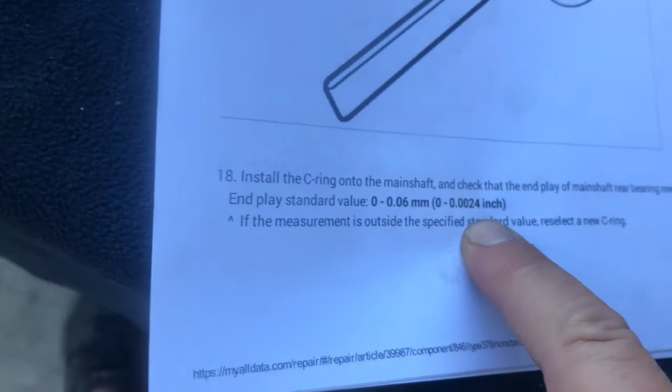I have a 1.5 thousandths feeler gauge, and you put it right underneath the snap ring, and this goes in perfectly fine. It's kind of tight as you go around, so I'm okay with this. The measurement is 0 to 2.4 thousandths, and we're at 1.5 thousandths, so we're good on that.

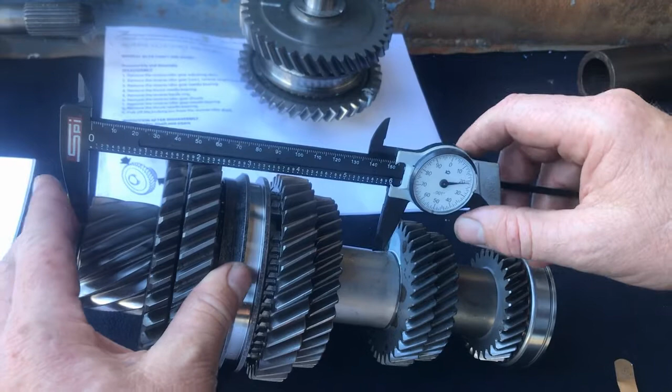So there's another measurement we're going to pay attention to, and that is from the bottom of the small gear to the top of this extension. We can't extend this all the way to the measurement, but we could use an estimate. From the edge right here, that's our measuring edge, to the top of this gear, it should be 1 inch. So this is what we're measuring right here.

Okay, so you look at the picture, we're pretty close to it. We're measuring to the top of the extension housing right here. At the college, we might have a tool that will actually work, so we're just estimating this.

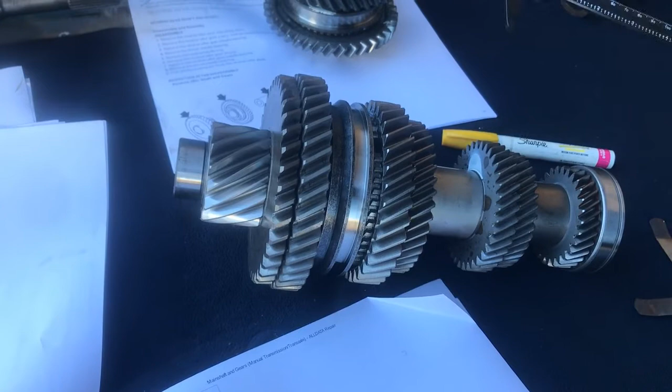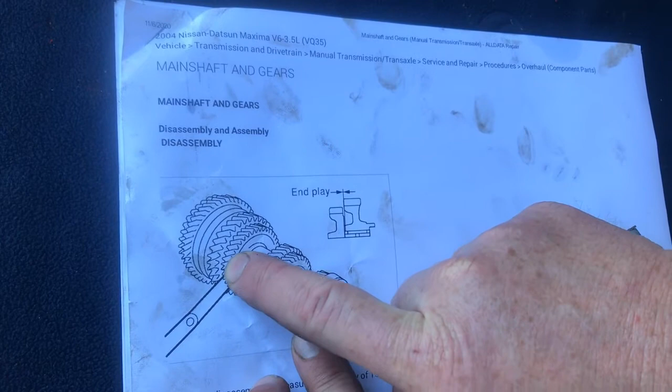And the last measurement is going to be this feeler gauge measurement, the end play measurement right here between these two gears and these two gears. It should be anywhere from 10 thousandths to 60 thousandths. So I have a 28 and a 30 put together, so that's 58. And I'm going to measure the clearance in here.

And that is a nice drag on my tool. By the way, there is movement, so you can actually move this gear in and out a little bit. So there's supposed to be some play. And here's the other one right here. Okay, so 58 thousandths for both of these. I'm actually pretty happy with that.

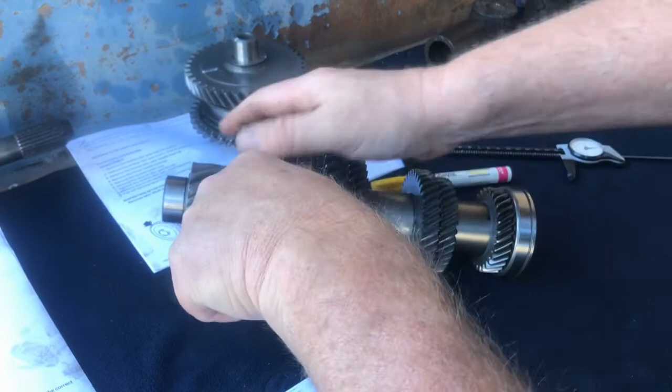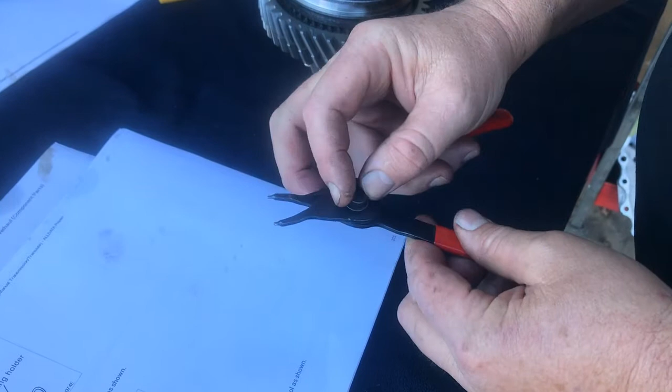So we're going to remove the snap ring, and then there's a C-ring holder, and then there's two C-clips. So we're going to do that. Understand on snap rings, they could be for where you got to expand it, or you could switch it where you contract it, so inside or outside snap rings, depending on your usage.

So a lot of people are not aware that some snap rings like this, you want to expand. Some snap rings you want to contract. I don't want to over expand it because it will stretch it. Okay, there's that, and we're going to start a little line like we did before. And here's - it's beveled on the inside. Okay, and then here's our C-clips right here.

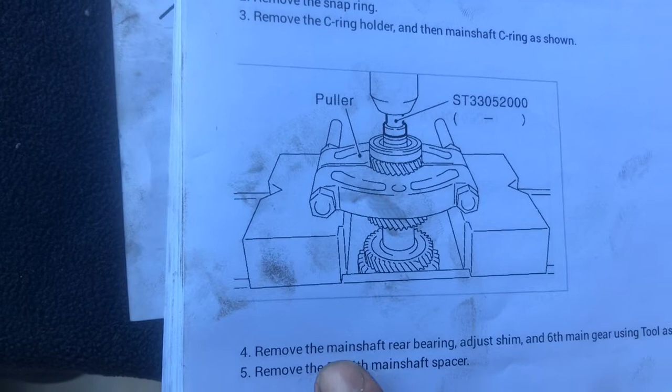Now the next thing is to remove the main shaft rear bearing adjustment shim and 6th main gear using a tool, which is just a bearing puller.

So we're going to go right underneath here and pull all this together. The book manual says to use a bearing puller and a press, but I'm going to show you that you could also just use a regular puller like this - get a socket in here or something like a bushing installer, put that in there and just run this down, and it'll pull it all off. But since we have a hydraulic press, we're going to use this.

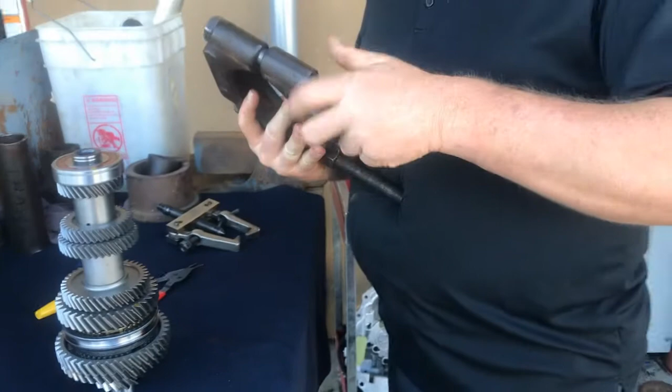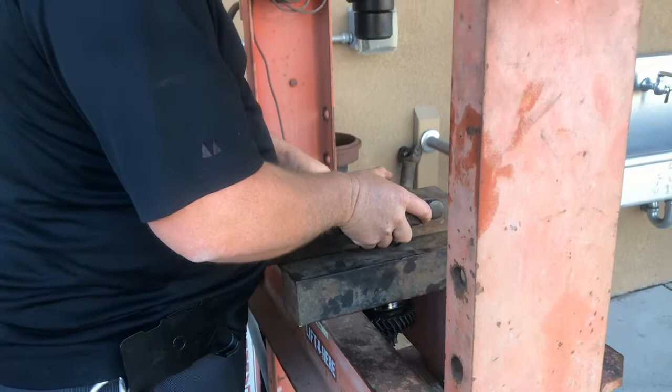Okay, so let's get it expanded a little bit. We're going to get that underneath there and then go right over to our assembly. Slide this in and make sure you're straight.

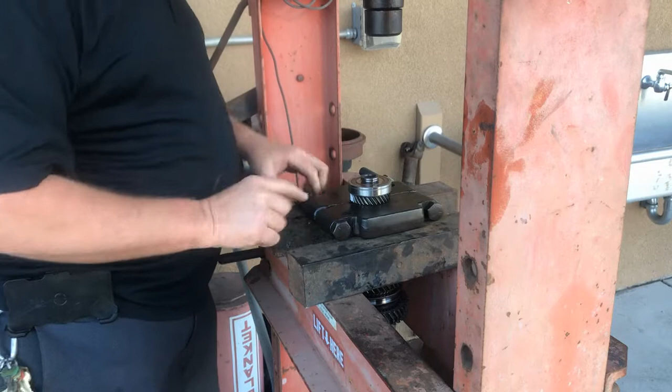And then we're going to tighten these down, but first off, let's get this lined up. And then we're going to use a socket to press on this right here, and then we'll need an extension. So we'll set it up now. Okay, we got it hit. I'm going to put my little bucket underneath here, catch the pieces that fall.

All right, there you go. Sometimes that socket is what works the best.

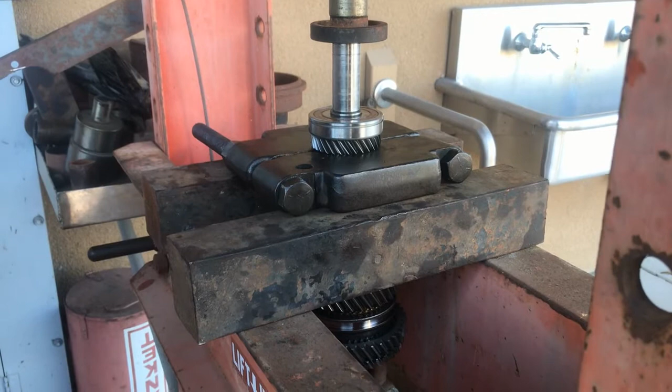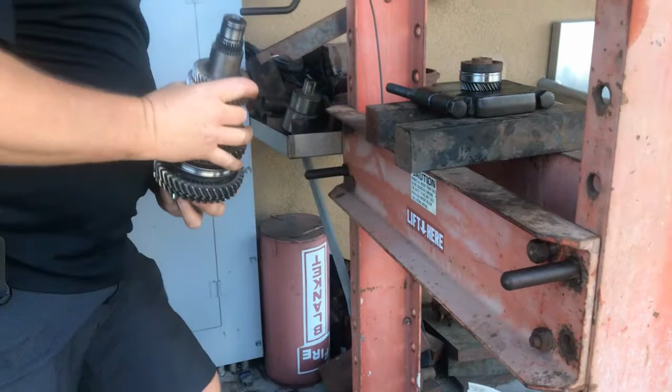There we go. Bring this over. Now we want to get it where we got our pieces marked properly. So remember, slide, slide. This one's not marked.

And this is always forgotten. So the bearing goes over the top of this, and there's a shim here. Okay, that's a thrust washer that's adjustable. So you got to make sure you don't, it's all those little details. Okay, like this, and maybe I need to do it on both sides so that way I know the double mark means that that goes with that gear.

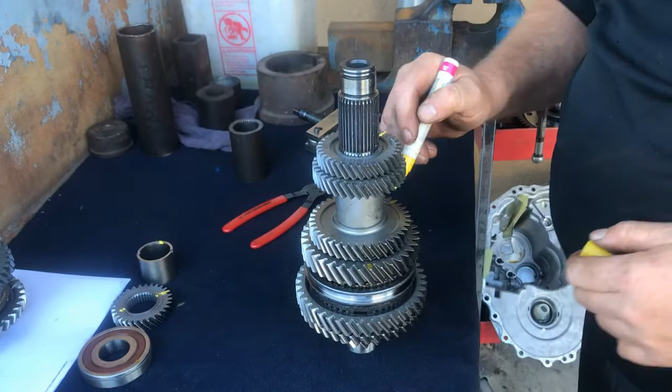Okay, now we can take this off, mark that. Got this gear already marked, this gear. So we're on our way. Let's go ahead and see where we're on instructions.

Remove the 4th gear and 5th gear simultaneously using tool as shown. See, there's going to be another adjustment shim after that. Okay, so we're going to go right underneath this, just like we did. Let's set it up.

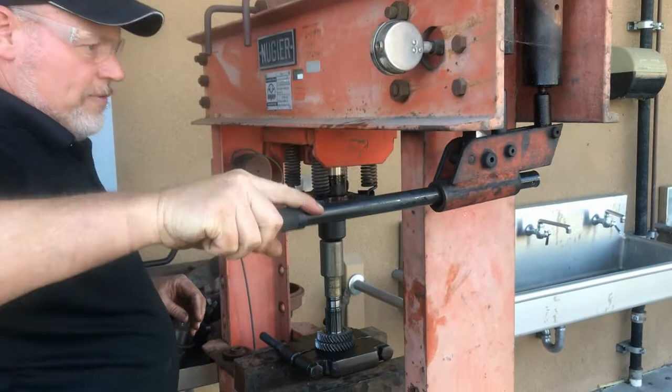Line that up. Go fast mode. Now we're going to go slow. There we go. Perfect.

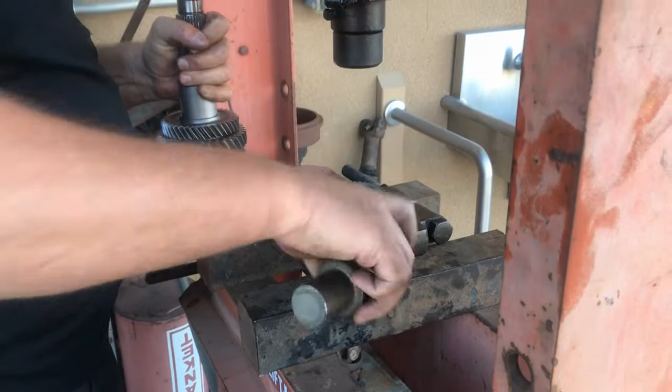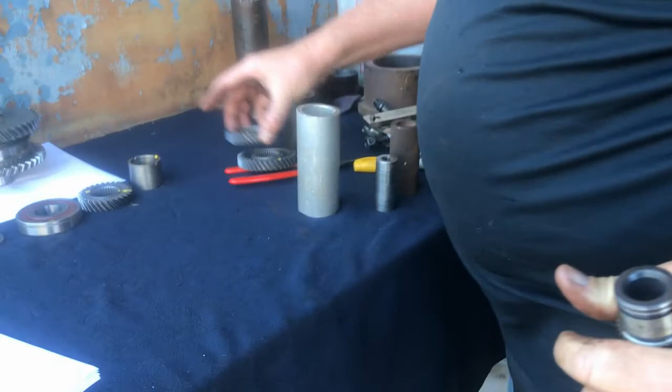Put it up. And you can see how these are splined onto the, so these are acting like a counter shaft. Okay, so gear, and make sure there's no shim. Okay, no shim underneath that. Here's the shim right here, and these are selective thrust washer shims, right?

Okay, so put that there, put that there. Now we have another pressing to do. So we removed the 4th and 5th gear main gear simultaneously. Remove that shim, remove the 3rd, 4th main shaft spacer.

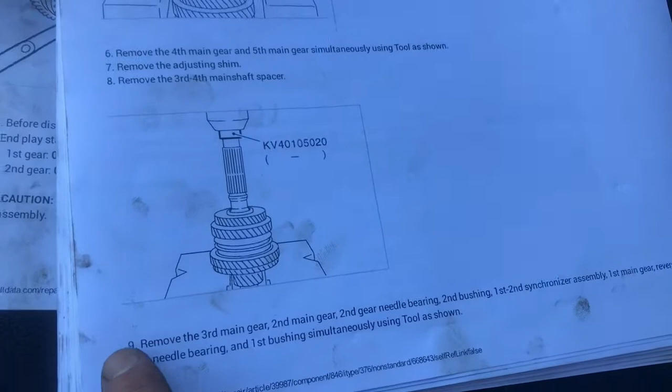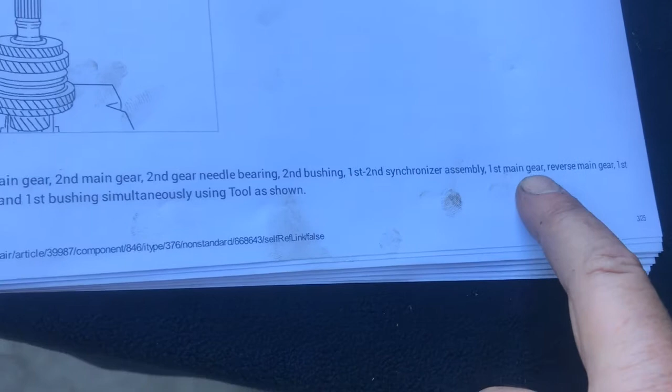Now we're going to pretty much move everything. The 3rd main gear, 2nd main gear, 2nd gear needle bearing, 2nd bushing, 1st and 2nd synchronizer, 1st main gear, reverse main gear, 1st gear needle bearing, and 1st bushing simultaneously using tools.

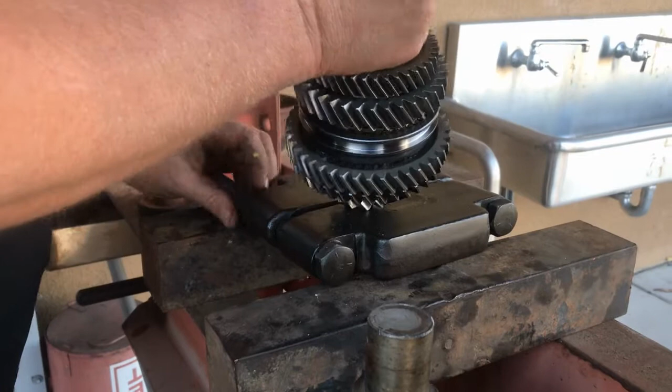So we're going to grab it from underneath here. Okay, so we're going to put this now right on top. Matter of fact, we could do it this way. Without that, we could go straight with this. Just like that. Now they do make cut ones, so they do make

adapters that are triangular or circle. Okay, so we could use these if we wanted. So, but this should be plenty of support for what I'm trying to accomplish. Okay, line that up right there, and then this should be enough.

So we have this nice little donut here. Gives us a nice, good surface to press with. So when you are working with a hydraulic press, you don't throw away all this metal. You keep it because, man, you need it for different purposes.

Okay. Also, save old bearings. So any old bearings are great for pressing other things apart. So save the races from old bearings. So here we go.

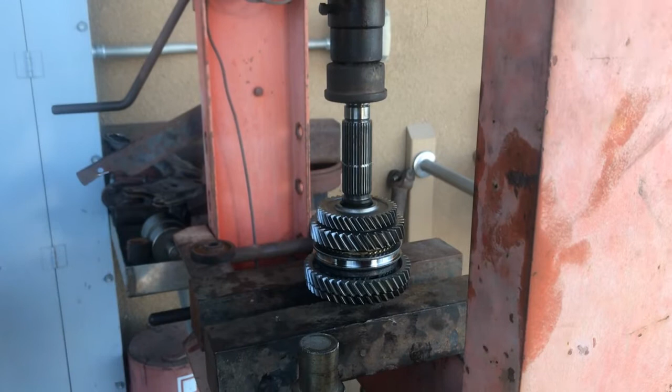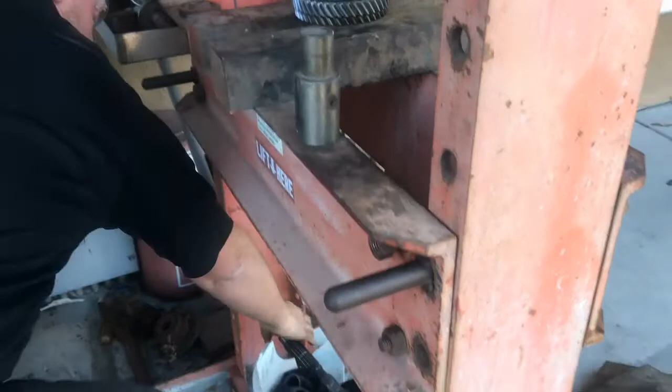There we go, and that's a good reason why you use a rag with a bucket. So here's our main shaft. Okay, perfect. Let's take all these pieces over here.

And let's line them up. Alright, so yellow dot, no shim, no shim. There's a bearing here. Okay, so take that out. Here's a needle bearing with a collar and a race all in one.

I'm just going to leave that. Oh, here, I'll put it. Why not? Okay, so now here's our synchronizer assembly. And this one's a very unique synchronizer. It's really cool. It's actually a three-piece design.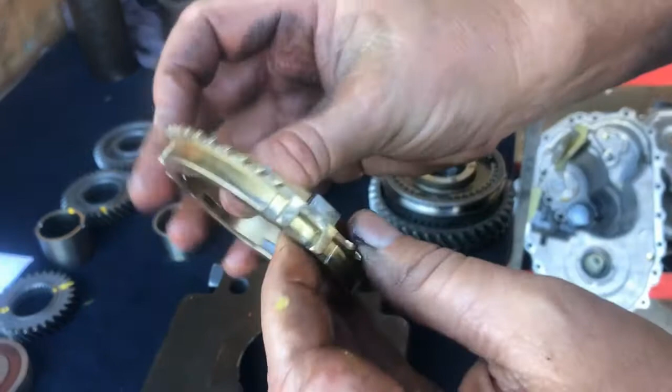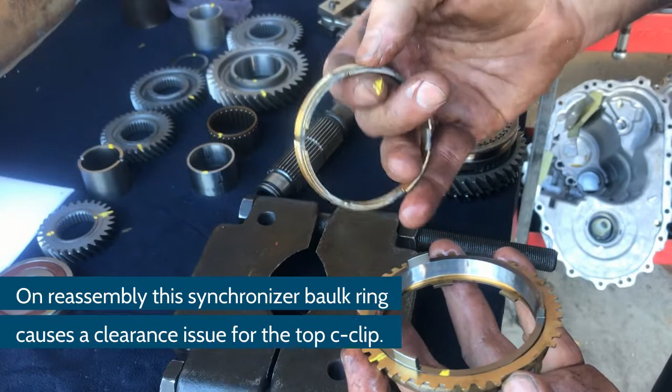So this is a baulk ring too, or a synchronizer ring. But you got the teeth right here that lock onto this conical cone. And then you have an inside in the grooves on the outside here. But this is the inside baulk ring that go inside here. And what that does, it increases the surface area of friction and multiplies it almost by twice.

So there's a special measurement for that, and we'll go over that. Here's our synchronizer hub with our keys and our spring. So you'll notice the spring inside ends at one of these lock keys, and then on this side it ends at this one of these lock keys.

Make sure this slides. Flip it over. Well, actually, before I flip it over, we want to mark it because this is the top. And I'll mark even the spring. Okay.

Because there is a top side and a bottom side to this. See the notches? 4 notches on the top side, 3 notches on the bottom side. And if you flip this, you just messed up.

Okay. You have another three-piece synchronizer ring and another bearing right here. So here's this three-piece synchronizer ring. That's the outer. And you have your cone right there. Then you have your inner baulk ring that goes in right there.

Okay. And then you have another needle bearing. So you have another bearing and race here. And then you have first gear.

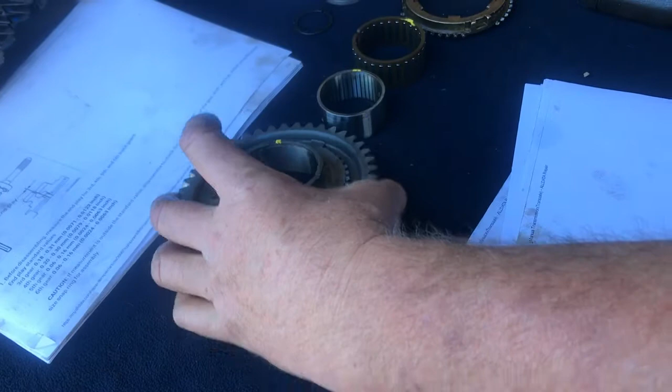And no shims, so always be aware if there's going to be a shim. And then this is the bottom gear.

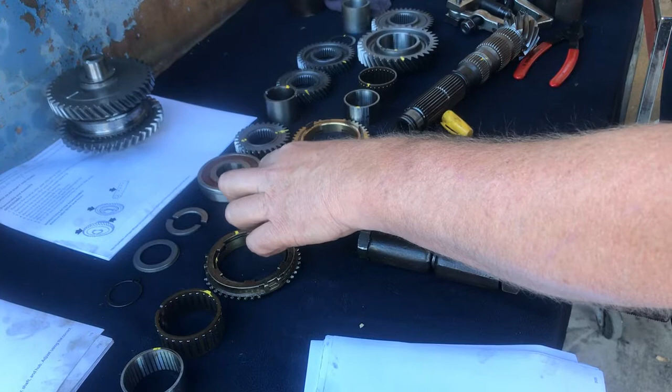A lot of pieces. 1, 2, 3, 4, 5, 6, 7, 8, 9. 2 springs, 10, 12, and 6 locking keys. That's 16. Another 3, 19, 20, 21, 22, 23, 24, 25, 26, 27, 28, 29, 30, because there's a shim. 31, 32, 33, 34, 35 pieces in that one cluster. So you have to stay organized.

If you come up with a different plan, so be it. But it better be a plan that works.

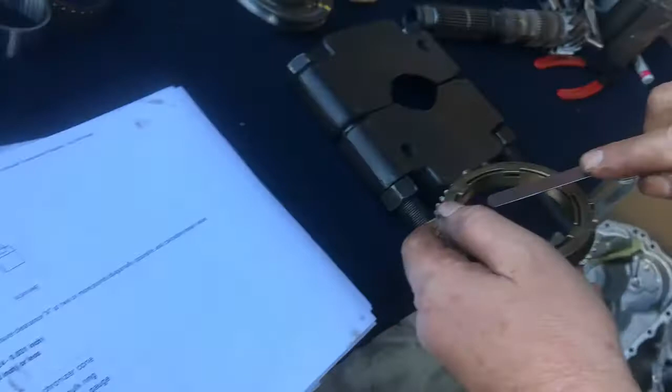So we have another measurement with a 3-piece baulk ring. Here's our baulk ring, and it wants you to measure between the bottom and the top one, right in this gap right here. And I got a 30, and I don't think I have this all the way down. Let's see. Yeah, it's probably because I took this one apart. There we go. Now it's together.

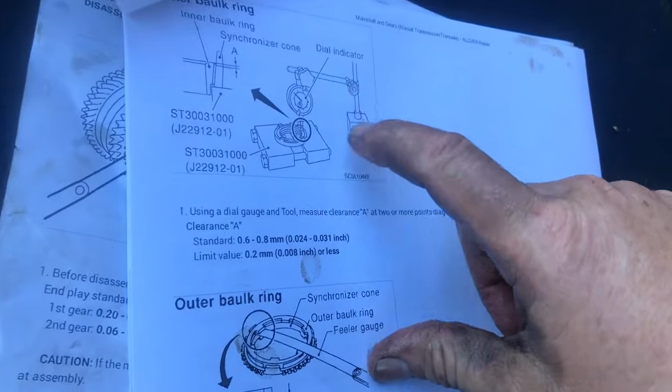Okay, so I get that little measurement. So you stick it right inside that gap right there. But the hard part is you can't have it on a flat surface because they come apart. And that's why they're showing you a special setup with a dial indicator and supporting this, because they do just come apart naturally.

So same measurement with here. This one I did not take apart. And let's see. It's a little bit loose on the 30 thou, but not too bad.

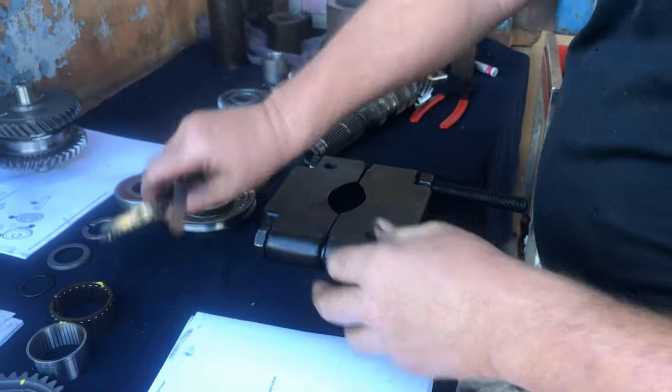Okay, so again, by flipping it around, you lose track, but you don't have to panic if you have that yellow mark. Okay, so in this one, I did not put a mark on, did I? Because that one faces up. Shame on me. Should have put a mark on that.

All right, so that's all the measurements. Now we can go back together.

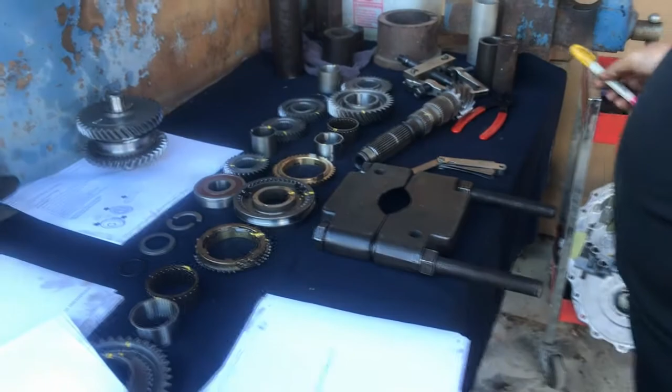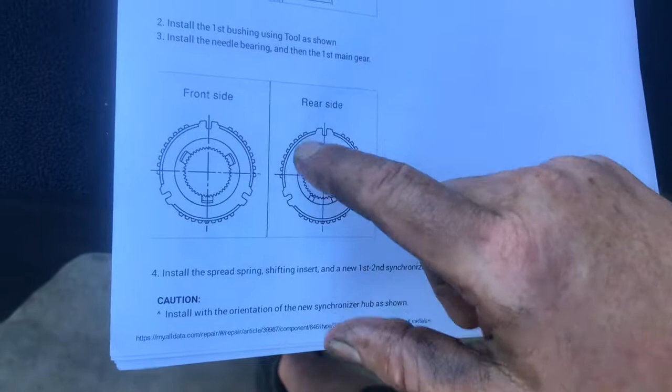Okay, so all this time I've been talking about direction. Here they're trying to tell you direction, and we just already went over 3 teeth versus the 4 notches. So this is referring to one of the hubs, and you got to make sure you got the right side facing forward.

First gear that we're going to put on is the reverse main gear using tool as shown. So we're going to put this on with the dot facing up, get it splined on, and then we got to use a long tube. Press that down. Okay. All right.

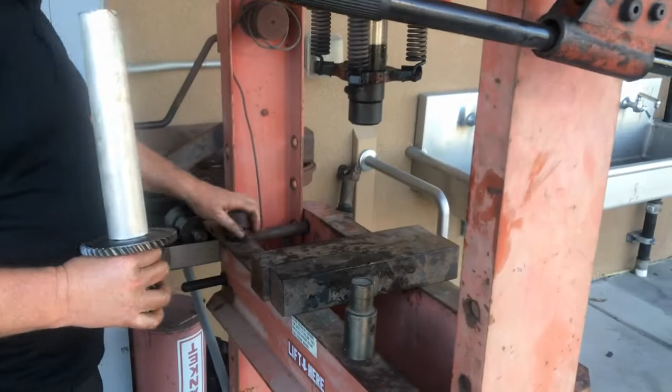I have to move my table down, so we'll stop the video. Oh, here we go. Rolling.

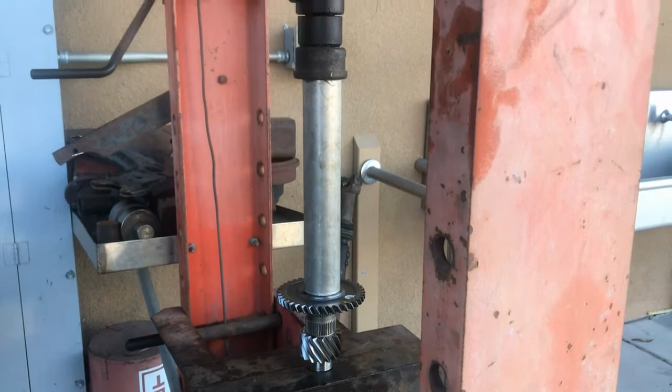Okay, so we're going to go fast down. Make sure it's all aligned. And press away.

There's our first gear. Okay. Let's go back to the table. Let's see what we got next.

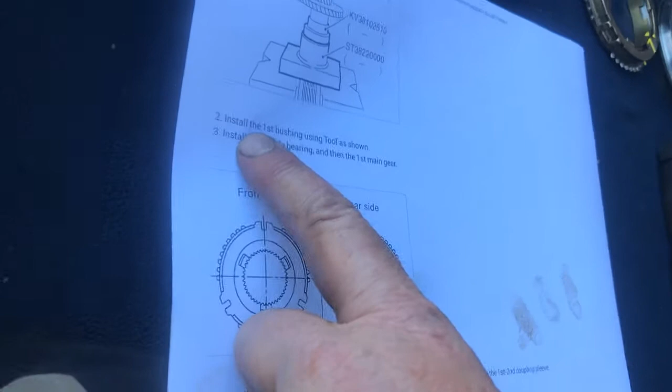So now it's telling us, you know, rear side. Notice rear side, directional. See, even the book is worried about you getting it wrong. Install the first bushing using tool as shown.

Okay, so we have the next gear right here. Oh, this is the bushing. Got it. That's the bushing that the bearing rides on. And you can see how it was a press fit by the rings inside.

Okay, we don't have to really worry about the oil hole lining up because it's a groove all the way around. So I would say we'll get it pretty close to that. We'll drop it down right on top. Mark. Get it exact. Huh?

Line up the yellow marks. Oh, I can get it really close. Yeah, but I didn't mark it for that purpose. Okay. So yeah. So, oh, I see what you're saying. Do this.

Good idea, Jordy. I like that.

All right, so now I got to find an adapter that will fit that. Yeah, I like this one. So it sits right on the race, but it does not hit the input shaft, so we're good. Yeah. Go over.

Get it going straight. Use my little donut. Fast. Oh, down.

Wasn't quite happy. It was kind of cocked on here, and if you get it cocked, you might not be able to get it off. So I made sure I was going on straight before I start pressing this thing. Okay, if you start pressing crooked, then a little collar like that could be a nightmare to try to get off.

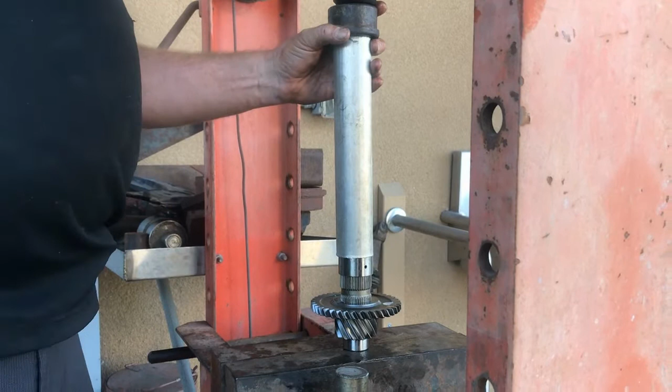And I'm gonna go slow now.

Don't really have to force it, but you just got to go until you feel the resistance. And now that's down all the way. Now the bearing and the gear will go over like that, and then it's going to be this synchronizer assembly.

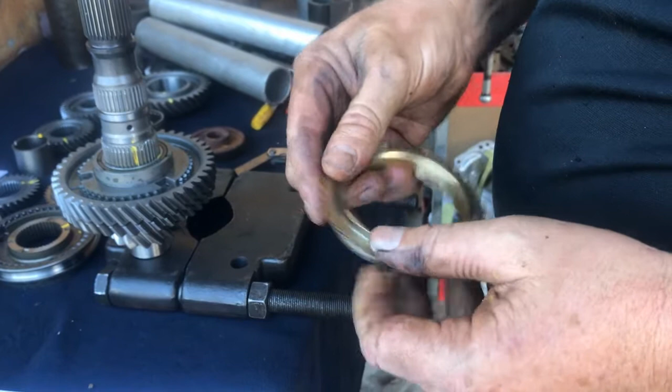So we got to get this synchronizer assembly perfectly lined up. And you have those little notches. The notches got to go in the notch of the gear there. See, there we go. So it has to go in those notches perfectly, and then the outer one has to go in the notch here. So there's two notches you have to align.

Now we're ready to go with the synchronizer hub, sleeve, and we did not take apart the lock keys on either side. This is where the direction was important according to the book, which is right here. Rear side's facing this way, so we're going to go ahead and go over it. The one thing you got to keep in mind is the lock key has to go onto these notches here. So how do we do that?

Well, marking, just like we did with that hole. So marking, I'm going to go straight up like this, and hopefully I can get that blocking ring to line up when I go press this on. So again, here's the top side, here's the bottom side. Line that up right there.

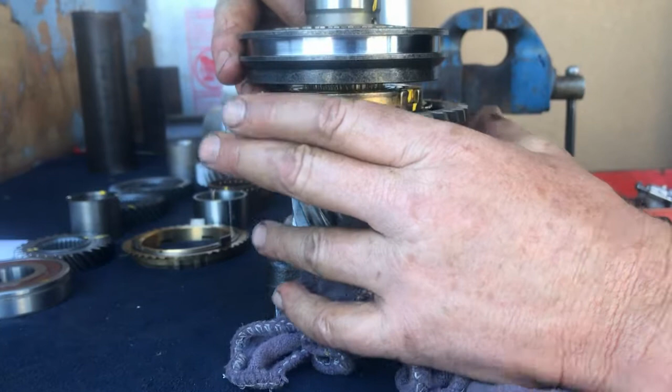This back in. There we go. Get that on. There's on a spline, and then I'm going to go ahead and make sure that this blocking ring is lined up right there. And let's go to the press.

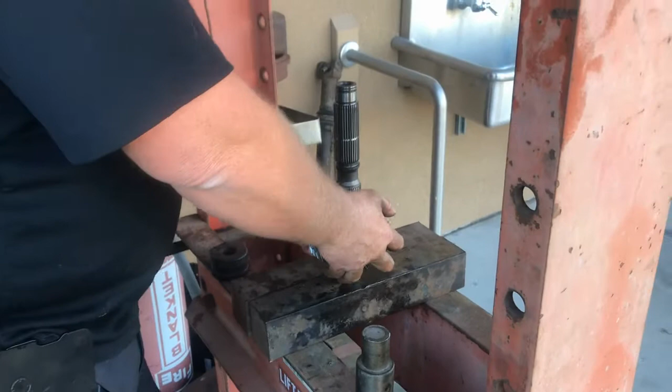You also need to make sure that snap ring didn't fall down on the bottom side. So it has to be still attached on the bottom. So let's see if I can use this. I'm happy with that. And we need the donut.

And you see how we move that whole gear and it should toss down. Now all I'm doing is holding the synchronizer sleeve up, so I don't have to worry about it. Let's see, looks like we're good. Let's go a little more. Let's go up. Yeah, I'm good with that. Okay, so then we still have these keys all hooked up.

So now let's go to the next one. This is the other blocking ring setup. That should just go right in there like this. We have another collar here. We can put that down, lining the hole up, lubrication holes up right there. And we already have a pipe we could use. We'll go on this way.

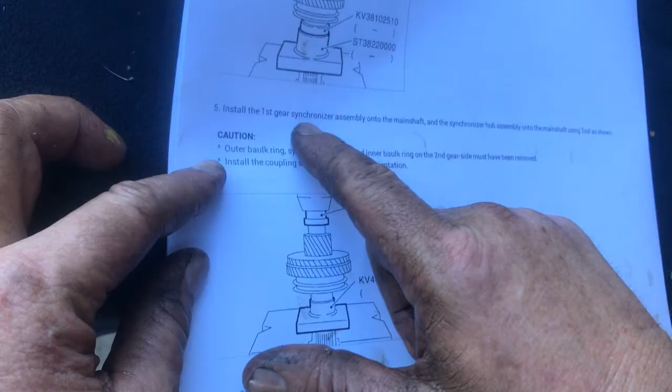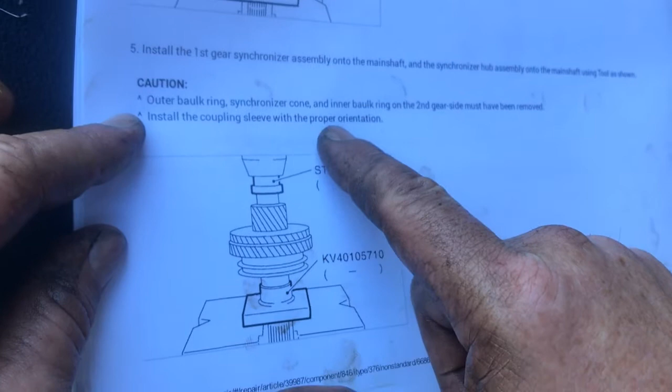So the first gear synchronizer assembly on the main shaft, the synchronizer hub, and the main shaft using the tool. We removed the baulk ring, synchronizer cone, and an inner baulk ring on the second gear. Now what you just saw was we pressed on the coupling sleeve with the proper orientation, meaning the holes are aligned. So now let's go ahead and go to the next one.

Install the second bushing using the tool. Install the outer baulk ring, synchronizer cone, and inner baulk ring. Install the needle bearing, so let's go ahead and install the needle bearing. Now we can install the second gear. Okay, and now we're going to install the main gear, third gear.

Okay, so this is splined on. So that's our next step. So I just lined up my splines to the third gear right here. I'm going to take my tube again, slide that down. Hopefully my donut will still work. Yep, and we're going to press this on. Yellow dot facing up.

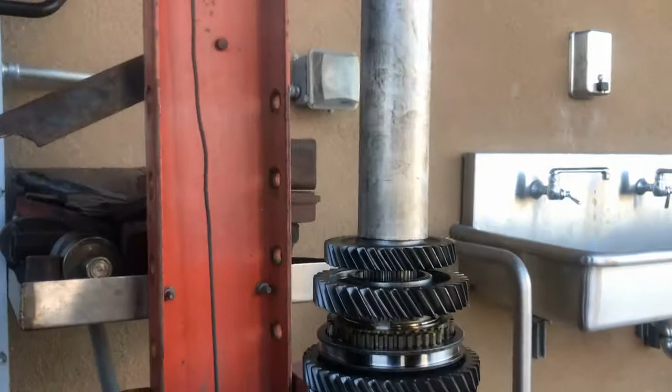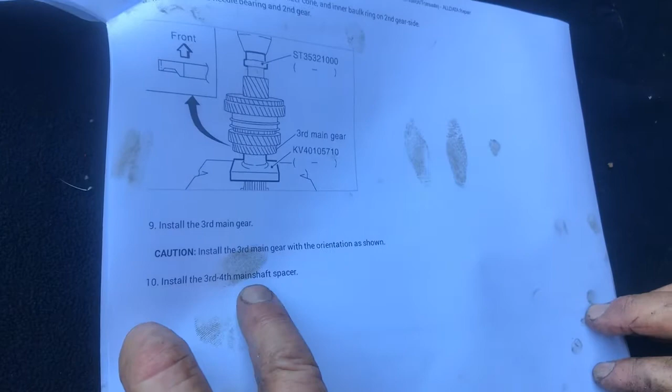Alright, so install the third, fourth gear main shaft spacer. That's this right here, so we're going to install that. Then we're going to install the shim. Oh, actually, it's showing you the adjustment shim. So this is where I showed you at the beginning of the video.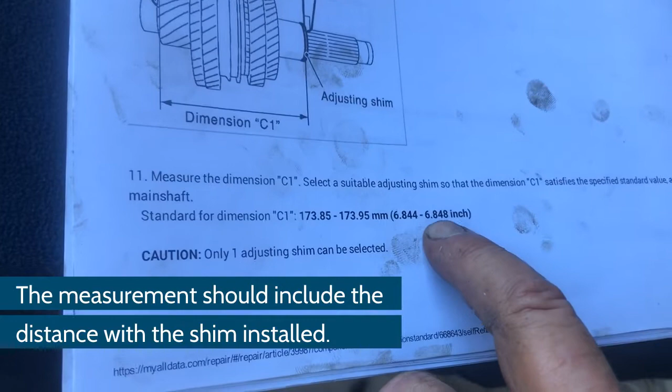You take that measurement from the bottom of the gear here to the top of here with a proper vernier caliper. Mine was too short, and it should be 6.844 to 6.848 inches. The reason why you do that measurement is you might have to change to a different thickness shim. We're going to measure the shim and see how it compares to this chart right now.

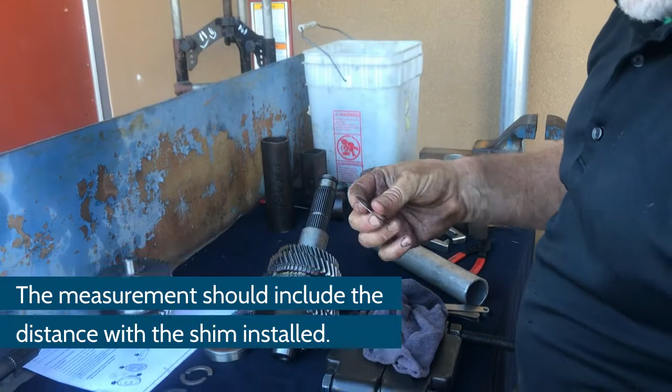So I'm going to zero out my vernier caliper. I'm going to expand it, and then contract it, and it looks like it's 30 thousandths. Let's see, 33 thousandths, and then it goes up from there. So this is the smallest shim. Okay, so 33 thousandths shims, right.

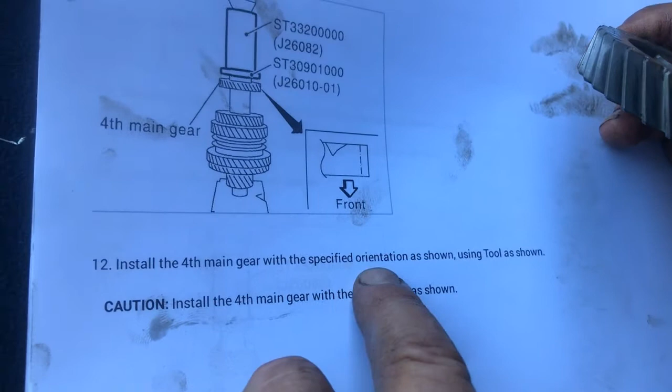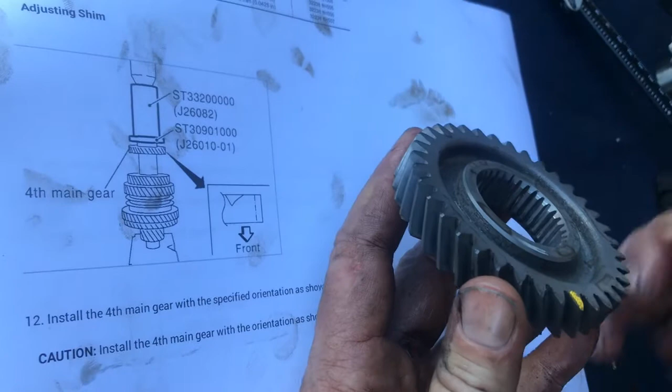Okay, I keep reinforcing direction. We know direction because of the dot. It says right here, install the fourth gear with the specified orientation as shown using the tool. So this is the image they give you for fourth gear. What they really don't show you too well is this ridge right here is right on top of the gear, versus the other side is flat. So the picture's a really poor image of trying to show you that this side faces rearward. That just reinforces what I've been saying: don't trust anybody but your own markings.

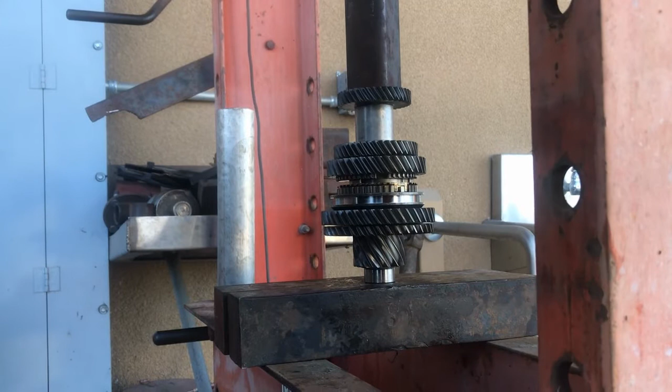Okay, gonna go fast, go down. This is pretty far. Almost there. It's touching. A little bit of pressure, not a lot. Go up.

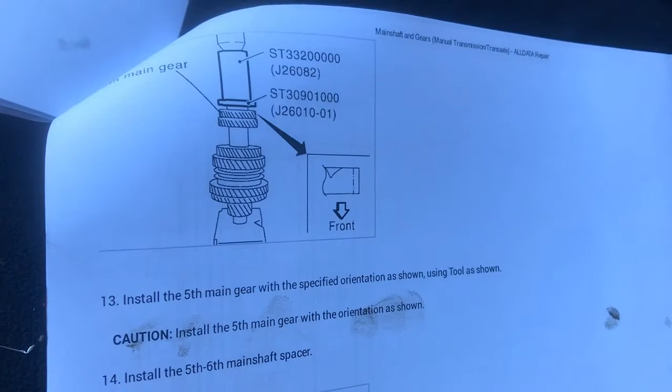All right, let's see how we're doing now. Okay, so we just installed this. Pay attention to orientation. Install the fifth main gear with the specified orientation as shown. So again, they're trying to show you the collar sticking above it versus this collar, and it has this little edge. I don't know how to interpret that, but I do know about that.

All right, let's go back down.

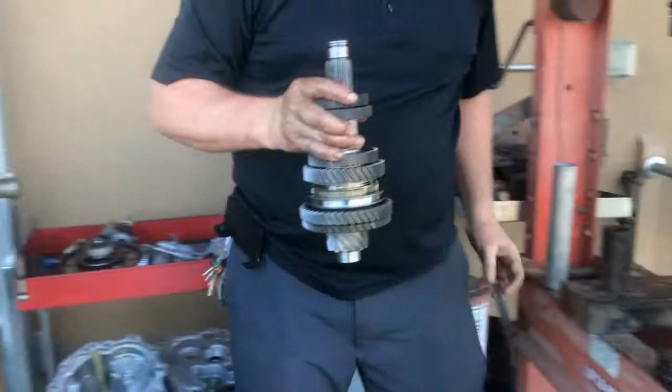Alright, we're getting somewhere. Install the fifth-sixth main shaft spacer. And it's trying to tell us to align it properly, but this just fits over there. And then this has that selective washer here. Now I'm going to press it without that right now and just go with the gear.

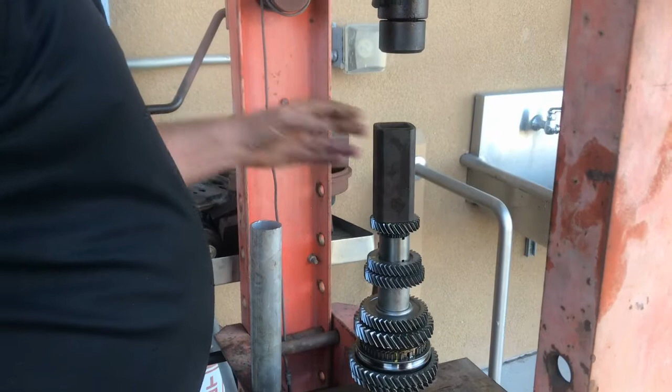And I might be able to use a bigger spacer this time. Yeah, that'll help me out where I don't have to go as far. And I'm going to try to do this one fast as well.

And bottomed out. Now I'm going to go slow to get that maximum press that I want. So if you're doing fast, you're not going to get it down all the way. There'll be a couple thousandths you're not getting. And if you didn't get it all the way pressed, these two gears, then you would not be able to get the snap ring on at the very top. So that's why I'm going slow, is I've got to get this all squeezed together so that clips on.

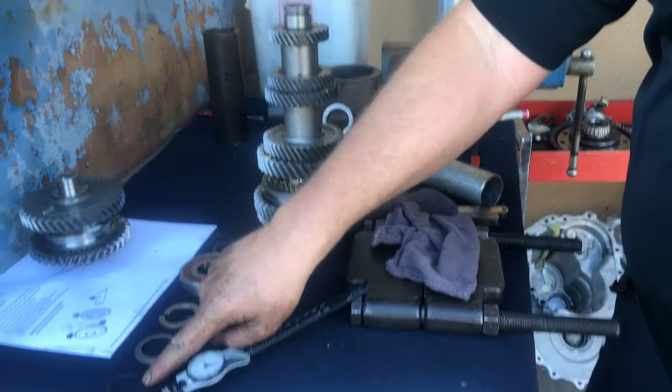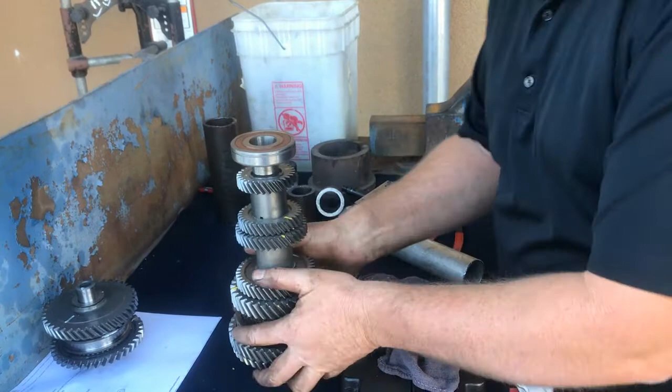Got our bearing. Okay, hold on. Sometimes it's good to have two people. I was going to put the bearing on before I put that shim on. Look at that. Okay, golden. That would have been a real problem if I didn't have that shim on there. Now I could put the bearing on and press this together.

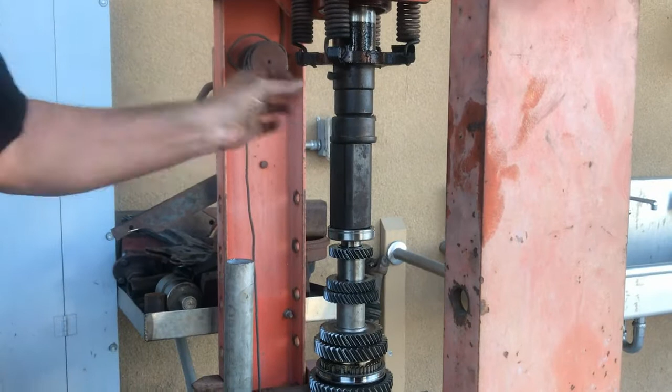Okay, I'm going to try and go with the same setup I was using. That was our last press.

Okay, now we're going to put these C-clips in. So we were starting to assemble the C-clips and they weren't fitting on the top. And during the process of going back and forth, I didn't make sure that this gear fell down on top of the synchronizer lock right there. And now you could see how much more pressing we did. So what we did was we took the bearing press and put it underneath here and drove the shaft, pulling all this together up so then we could turn this gear and properly insert it. So now it looks like we should be able to press this all together.

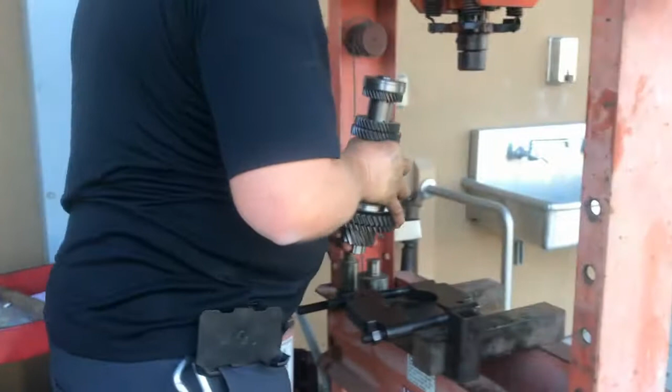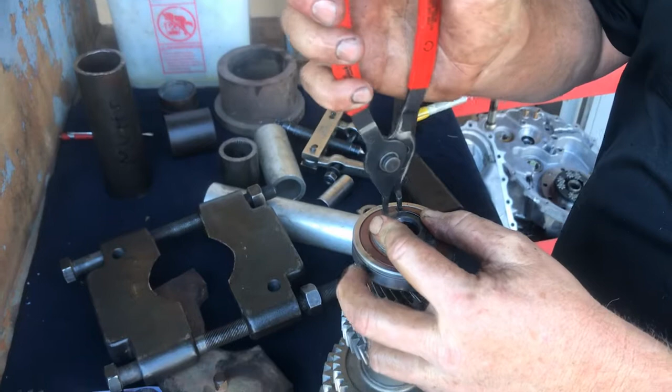Go up. Now I should have a lot more clearance on top. So we got the two C-clips in, put the collar on, and then the last step is the snap ring itself. And it clicked, and then my rule is it should always spin. Okay, and that is our cluster. Okay, perfect.